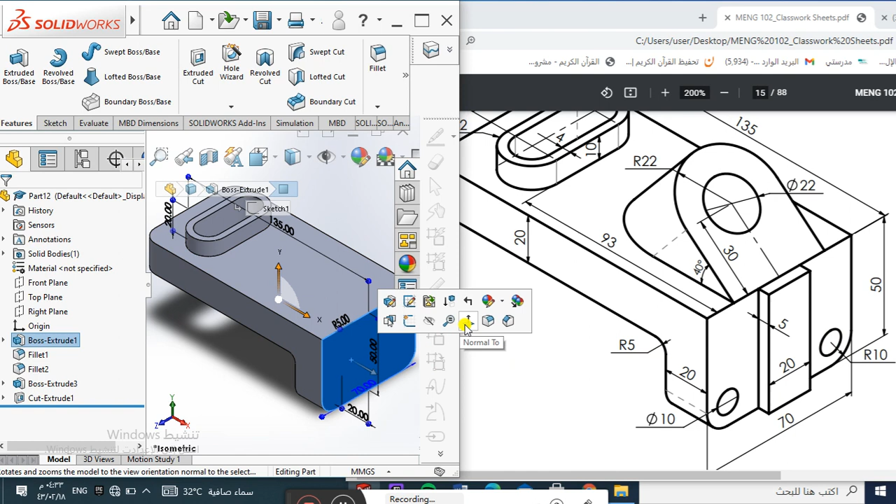First I have to choose this surface, normal to, sketch, activate sketch, make a drawing. Okay, I want to add the center.

So if you go around this area, you will find the circle or the center. Or if you just go and touch this arc, the software will give you the center. So click on this center circle.

This circle, what is the phi of the circle? Don't have it here, we have it here. So the phi here is 10 millimeters. So this is the phi of this circle, which is 10, check. And it's fully defined.

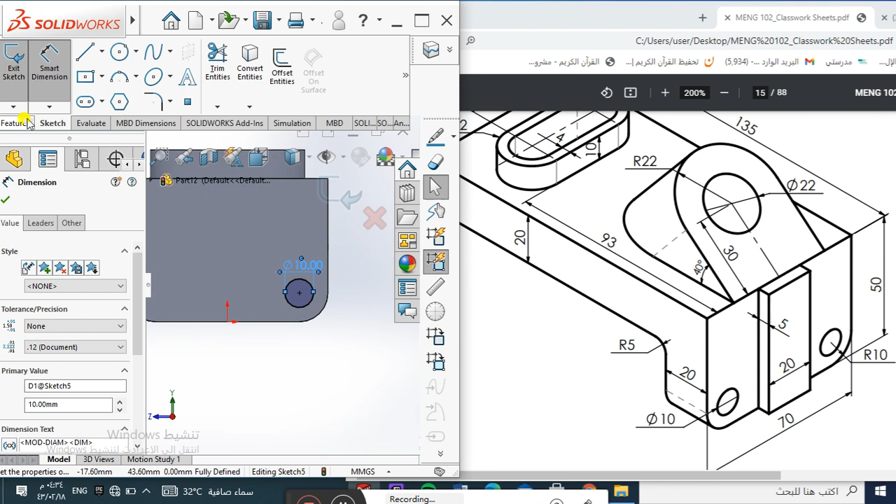Okay, feature, extrude cut. And all this extrude cut is through all. Okay, through all, check.

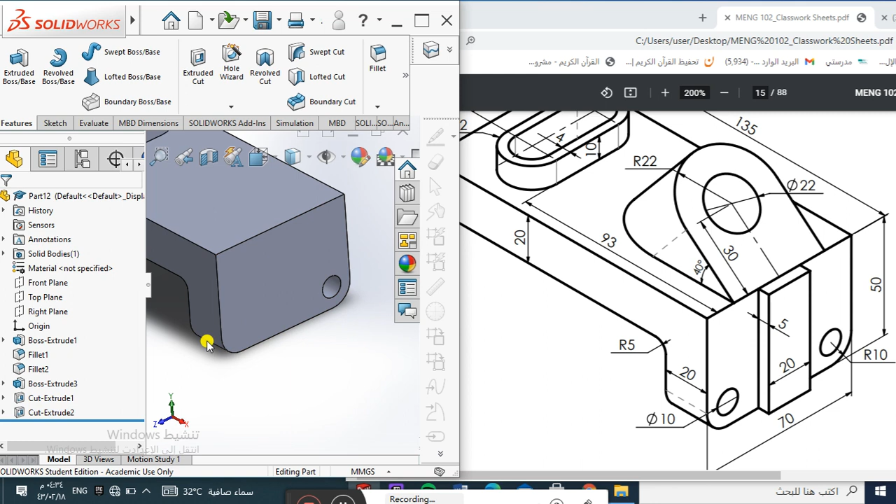Okay, we want to make a copy of the circle on the other side. So click on this cut, then maximize this window, then mirror.

Okay, this mirror should be, if you click on this part, the arrow here, is it around the front or the top or the right? Obviously it will be around the front.

So if you click on the front, it makes a copy. It makes a copy for this cylinder.

Cut to this side around the front, as you can see, the front plane. Okay, the front plane. Then check.

Okay. Now, the most important thing here is how to do this part. In the previous problem, problem 1, we...

introduced how to make a plane. Okay, a new plane. Then on this plane we can draw anything, then make an extrude. So the same thing here. How can we do that?

Okay, first of all we maximize a little bit, then reference geometry, plane. Okay.

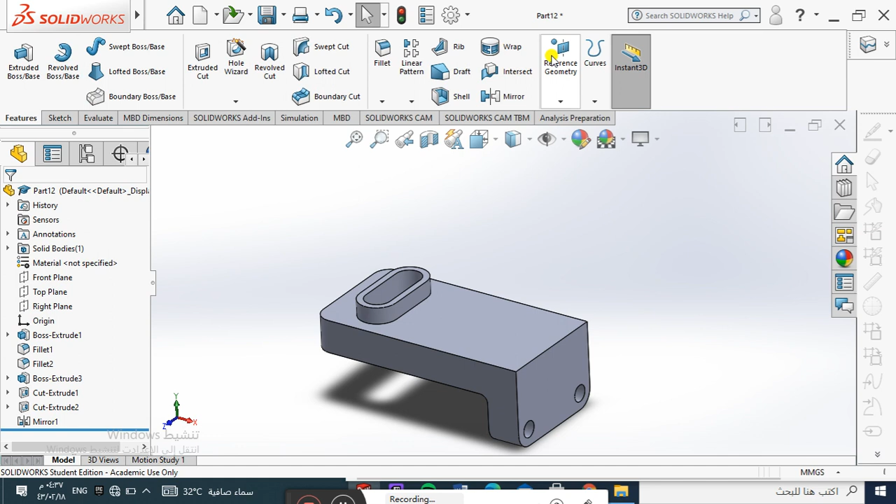We'll do it again. So first of all, escape to make sure that there is no sketch, nothing here. So feature, reference geometry, plane. We will add a new plane.

We need 2 references. Okay, this part is on which edge? Is it on this edge or this edge? No, it's on this edge. So we have to click the first reference on this edge.

Okay, the second reference is - this part is extruded on something. So what is this something, or what is this surface? You have the second reference. It has to be on this surface.

Okay, now he made a plane, okay, which is 90 degrees on this surface. How can I edit this surface to be 40 degrees? Okay, you have here an option.

If you go down, you go down, you can add here the angle. So click on this angle, okay, and now you can minimize the degree until it becomes 40 degrees, or just...

click on that and click 40 degrees. From this surface it's 40 degrees.

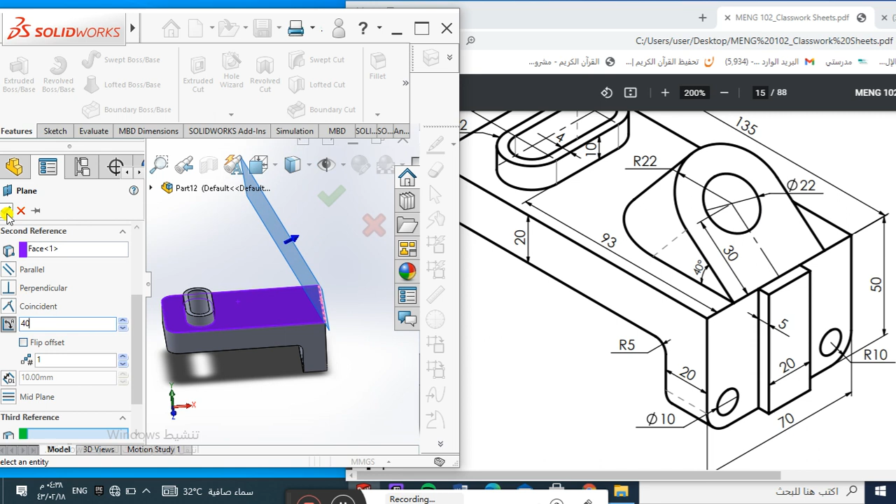So then okay, check. So now we have a plane on this edge, okay.

You can draw this shape, okay, on this new plane, which is not vertical, not horizontal. It has an angle of 40 degrees.

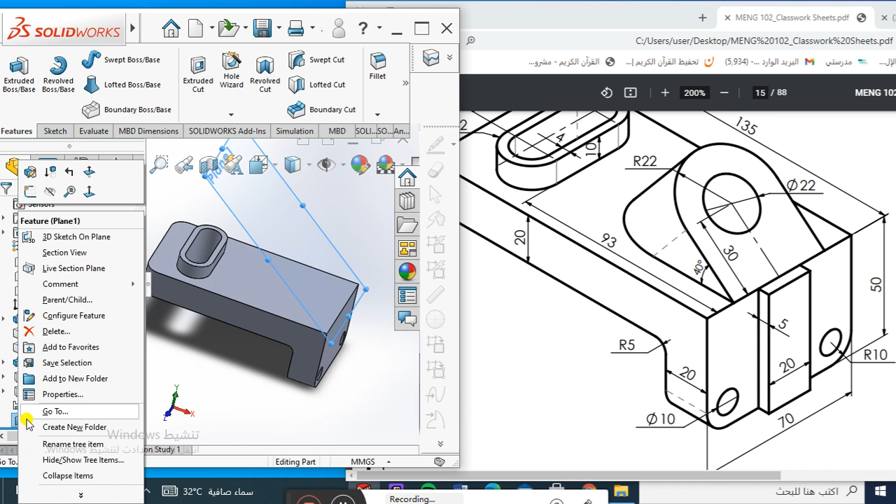Now go to this, click on this plane from the tree, normal to. We can draw now. We can draw sketch, activate sketch. I'm gonna draw, okay, this circle.

So we will make the hole, not now, after we draw the outside shape. So we'll go up, then we draw a circle. This circle has a phi of...

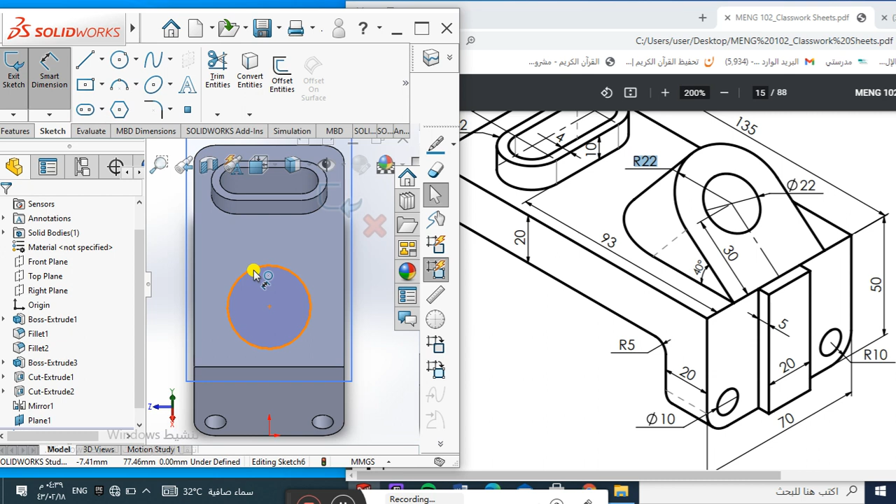44, so smart dimension, sorry, smart dimension. This circle has a phi, or a diameter, of 44 millimeters, check.

And also smart dimension of...

Okay, so we are going to add the dimension of this. So it's 44. Now smart dimension between this center and this edge. So from this center to this edge, what is the length here?

The length is 30, 30, 30, 30, check.

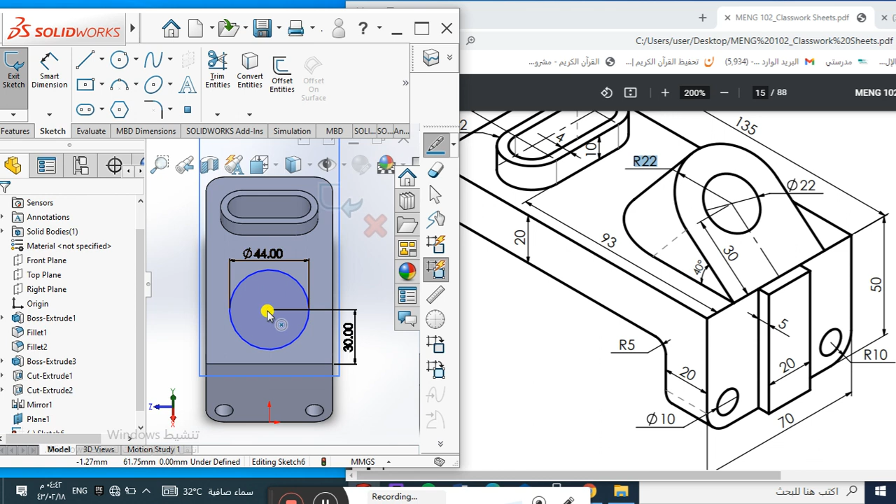Okay, still the circle is not fully defined. I have to add a relation between this point and the origin point. What is the relation here? For example, if there is no origin point, just find any midpoint between this midpoint and this center. What is the relation here? The relation is vertical. So now the circle is fully defined, you can click here and make a relation fully vertical, or any midpoint between this and this.

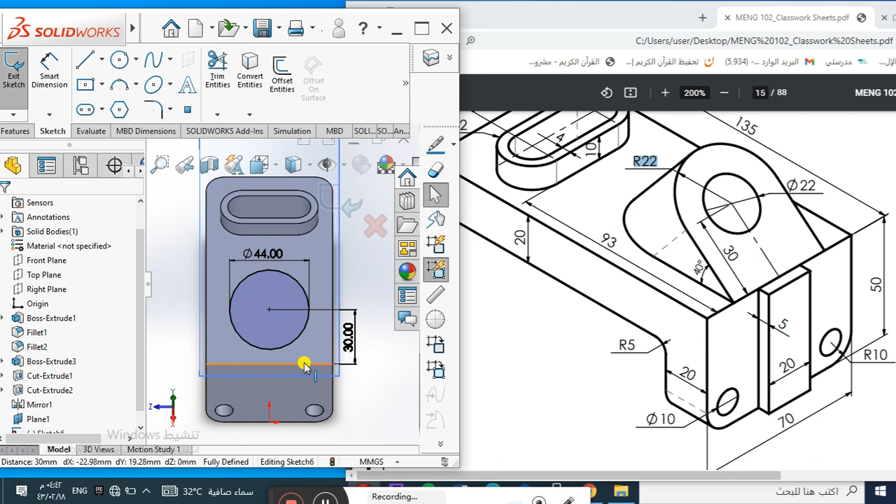Now I have to draw this line, then go left, then go up. So click on this line. You have to zoom in.

You have to click on this quarter point, go down, make sure that you are vertical, click here, then go left until it becomes vertical with the quarter point. Click here, then go to quarter point, click here, and then escape. Now delete this line, the lower side of this circle, because we don't need it.

Okay, as you can see, this is the shape, the outside shape. We will make the hole after we make an extrude. So feature, extrude.

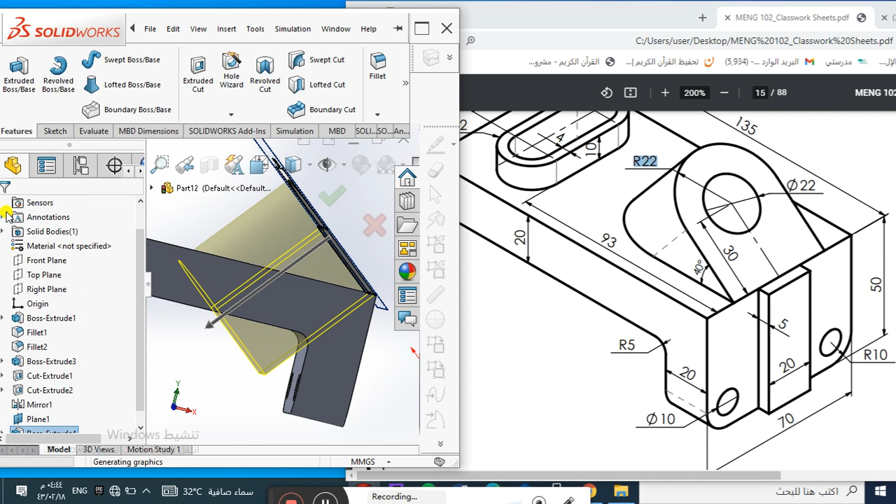Now, is the extrude in this side? No, you have to make it in the other side. Now just notice, if we made an extrude like this, there will be an extra thing which is not included. For example, if you did it like this, extrude, you see there is a new thing, or an extra part that you don't need.

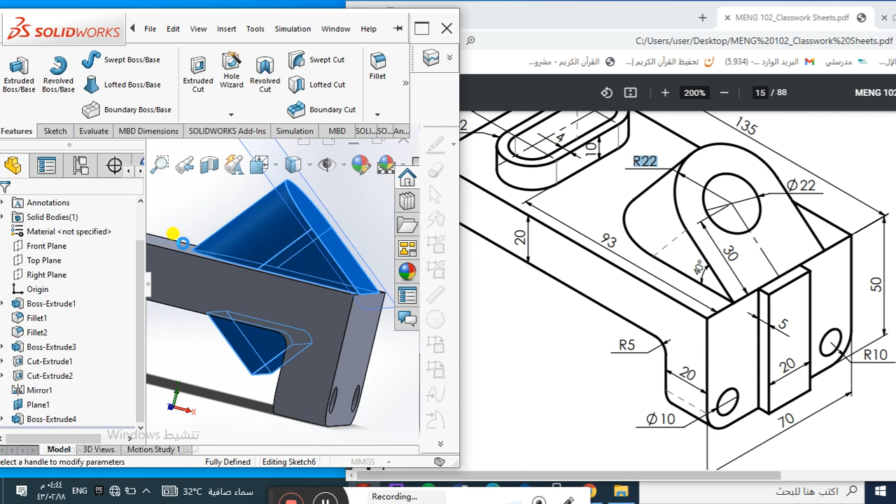How can you make the extrude up to the surface? He makes an extrude up to the surface. How can we do that? Basically you have to right click on this extrude we did, then edit feature to edit this extrude. Now don't make the extrude blind, make it up to surface.

Now he asks you which surface do you want to extrude and stop on this surface. We are going to click on this surface, so he makes an extrude up to the pink surface. Then click on check. So we don't have an extra thing here. We have a new extrude which is up to surface. We made an offset.

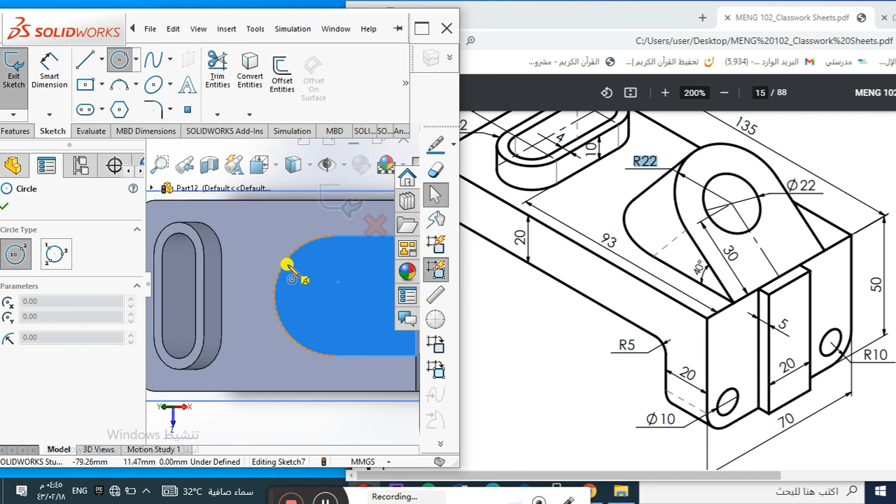Now click on this surface, Normal To. We're going to draw a sketch which is a circle. Finding the center, where is the center? We don't have it here. Just touch the arc and he will give you it. Where is it? Okay, this is the center.

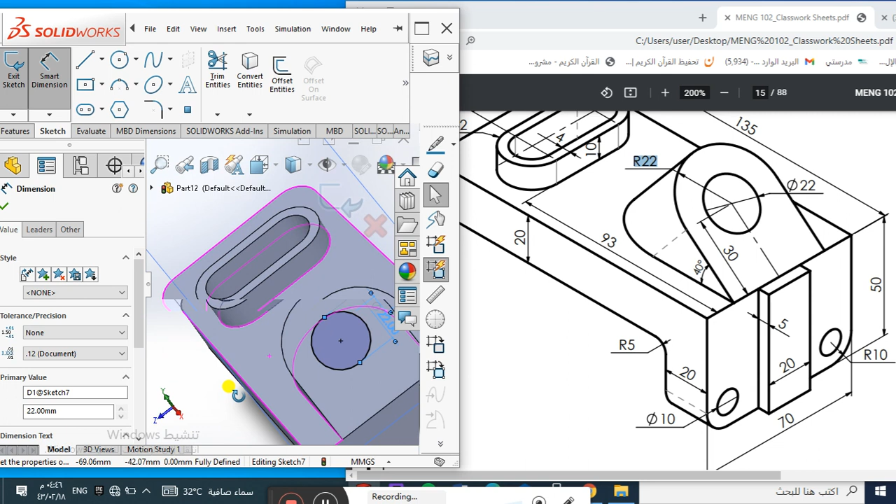Click on this center and make a smart dimension of this circle, which is phi of 22. Check. Now we made this sketch feature, we have a hole, so extrude cut, and make this extrude cut through all. Check. You can see, he made an extrude cut through all.

So make the circle after you make the extrude, then make a circle, then make extrude cut. Finally we have this part, very simple. We have to go front or top or right. We have to go to front, then Normal To.

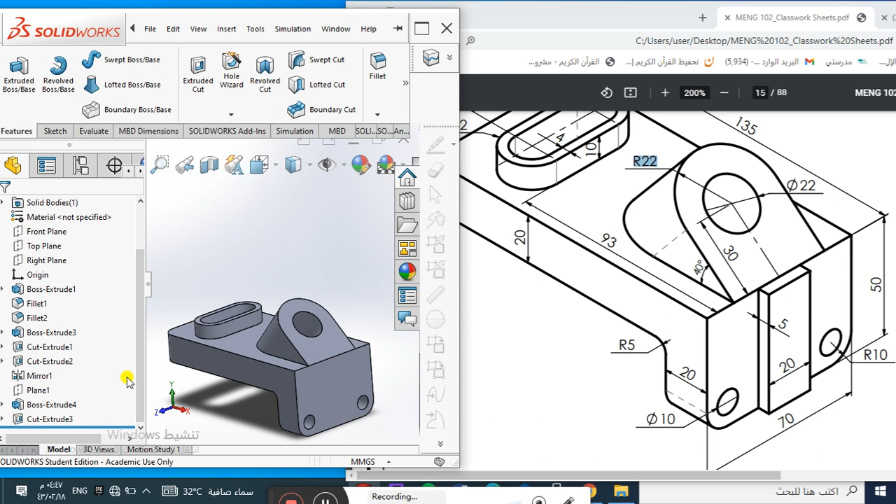I'm going to make a sketch. Before that, if I don't need this plane to be shown, what should I do? Right click, then click on this eye, so it's not there. If you want to show it, click on this plane from the tree, then click on this eye.

Now we have to again go to the front, normal to sketch. I want from the front to make this sketch which is a corner rectangle. From this point go up, to this point, click. Small dimension, the width here is 5 millimeters.

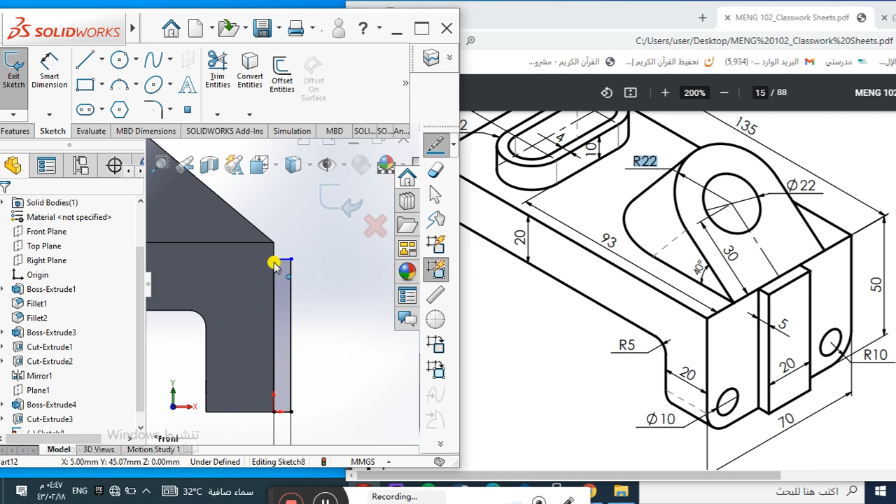Okay, what should I have? I need to tell him what is the relation between this point and this point, or for example this point and this point. The relation is horizontal. Check. Okay, we made this rectangle on the front plane.

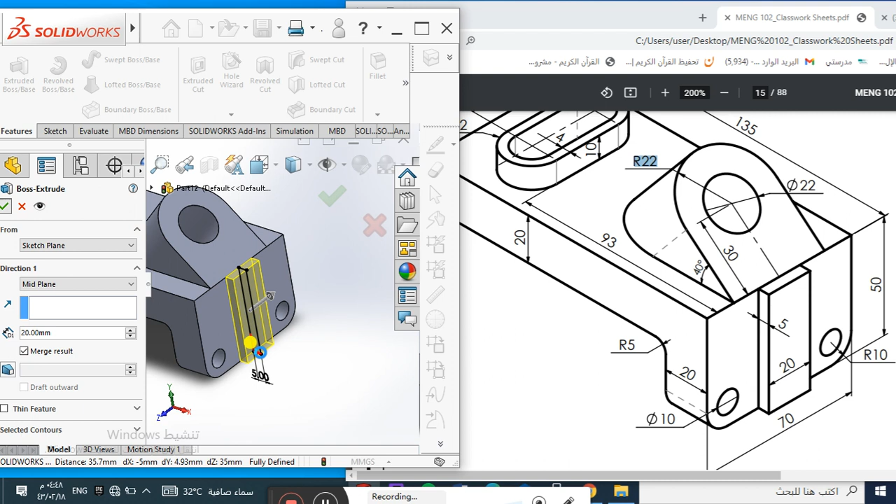Now feature, extrude. What is the width? The width here is 20. Is it on the left side, the right side, or mid plane? So I have to make the extrude here mid plane. Check. Now our model is completed, as you can see.

Okay, I hope this question is easy for you. Try to do it yourself and then go to question number 4. Okay, thank you.